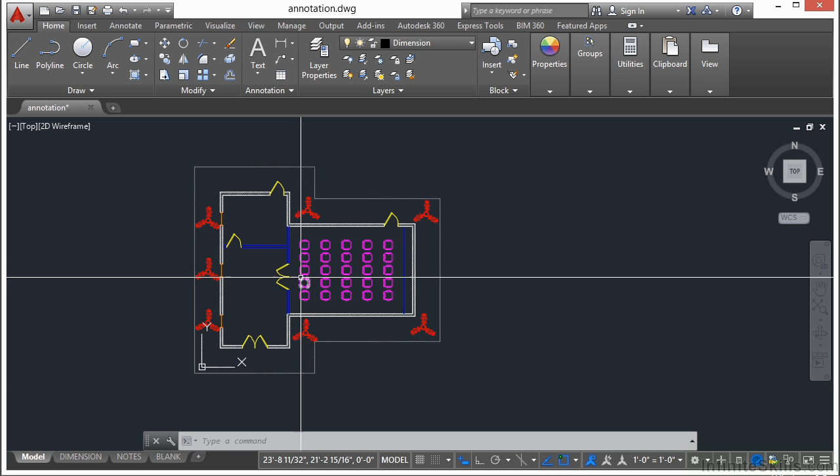So let's look at the door at the bottom corner of this building that we see here. This door block is a dynamic block. You can see here that it has a lot of different fancy grips on it. These grips are typically customized when the block is created. Let's go over some of these.

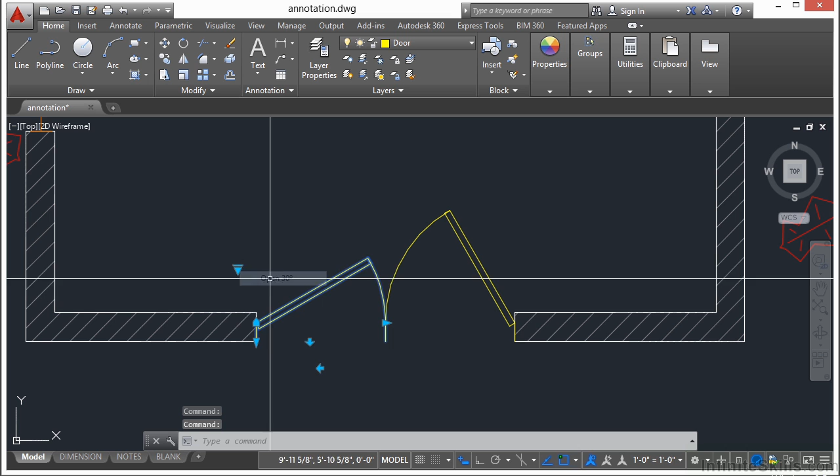You'll notice that when you hover over the grip, it will give you a bit of a tooltip. It'll tell you what it's going to do. This sets the angle of the door opening. When I select it, I have different options. I can make the door closed. I can open it up 30 degrees, 90 degrees, 45, etc. Very useful.

This grip right here sets the wall thickness. All I have to do is drag it up or down. You can see on the left, it changes from 4 inches to 5 inches to 6 inches, and the line work even changes. This button here aligns the block.

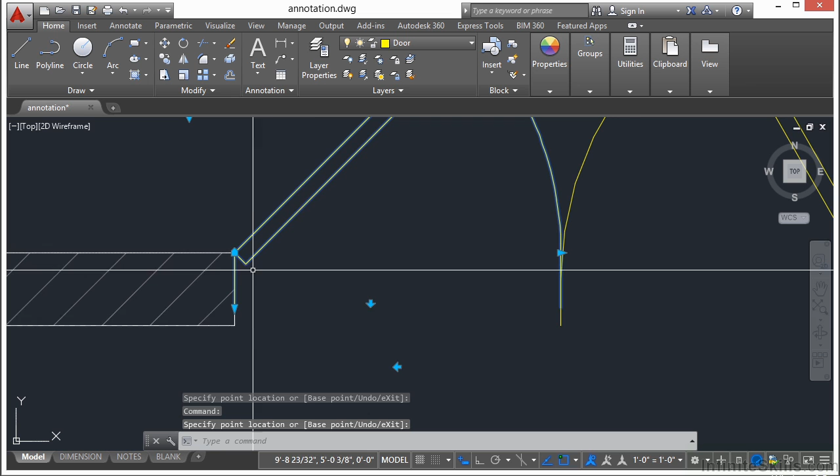It acts sort of like the standard move. This button here will set the direction of the swing. It opens in or it opens out. It's a toggle switch. This is very similar.

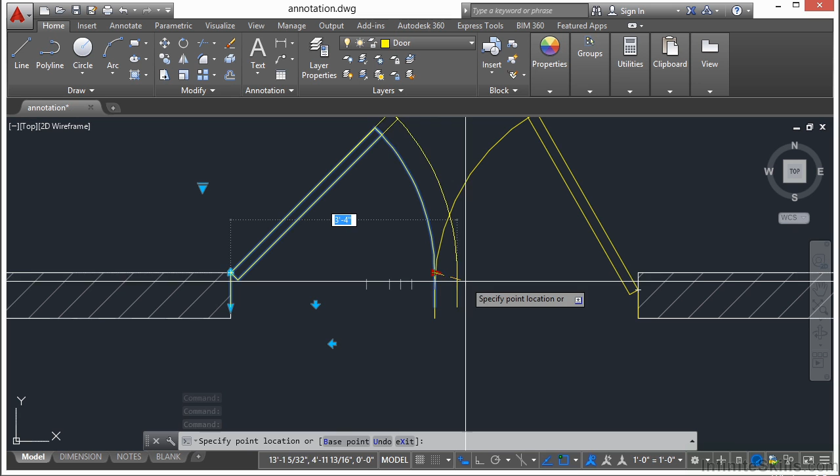This will move the door in or out. And then this grip here will change the width of the door. I can stretch it out to 3 foot 4 inches or all the way into a very tiny door of 2 feet wide. Just press escape to let go of that. All of these door block instances that you see here are the same block. It's very useful and helps in your design process.

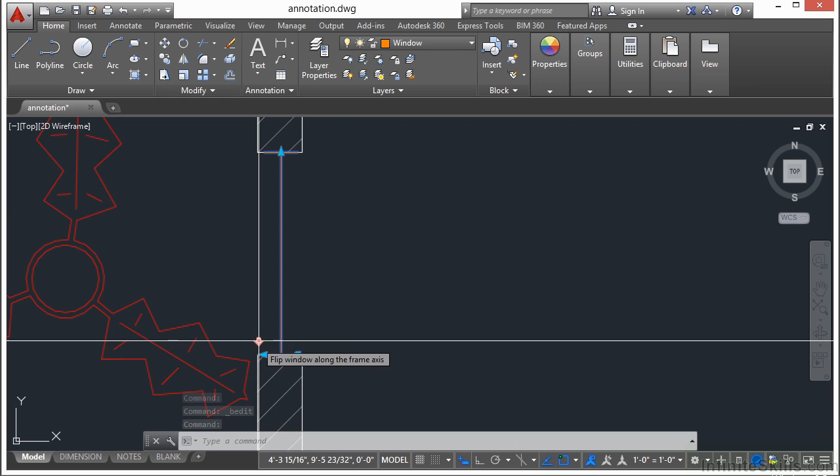Now the window block next to these doors over here is very similar. Now it looks very simple. It looks like just 3 sets of lines. When I select it, I get similar grips to what I saw before. This will flip it back and forth from side to side. This changes the width.

This relocates it to somewhere else. And this changes the width. This one is the thickness, depending on your wall. So you can see here, these blocks are very neat, very useful, and they can help out quite a bit.

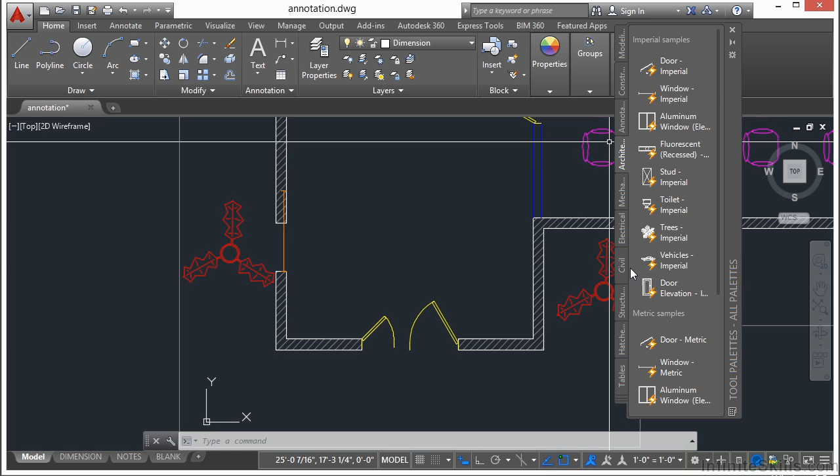Now, AutoCAD comes with several dynamic blocks already made. If you open up your tool palette by pressing the Control key and the number 3 at the same time, you'll get access to a lot of them. This is the door and window dynamic block that's already in this file. Now, when you look at this tool palette, you can tell if a block is dynamic or not because it has that little lightning bolt in it.

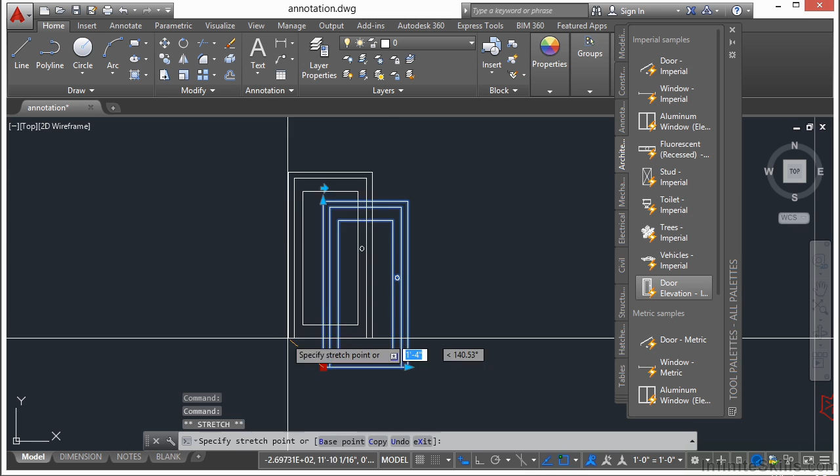Here's an elevation view of a door. I'm going to insert it, select it, and here I can change the width, I can change the height, and I can flip it to the left or to the right. And here I can move it around. Very simple, but yet it adds a lot of different dynamic abilities to it.

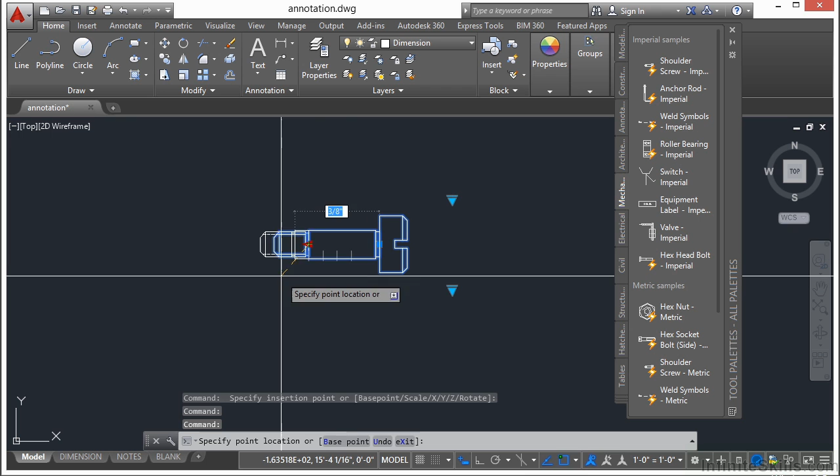If I go from this architectural tab, I go to the mechanical tab, you can see here I have a lot of other shoulder screws and anchor rods and things like that. If I select this shoulder screw, I can change the length of it, I can change the size and the style. So you can see here, there are a lot of different types of screws that I have available to me in one block.

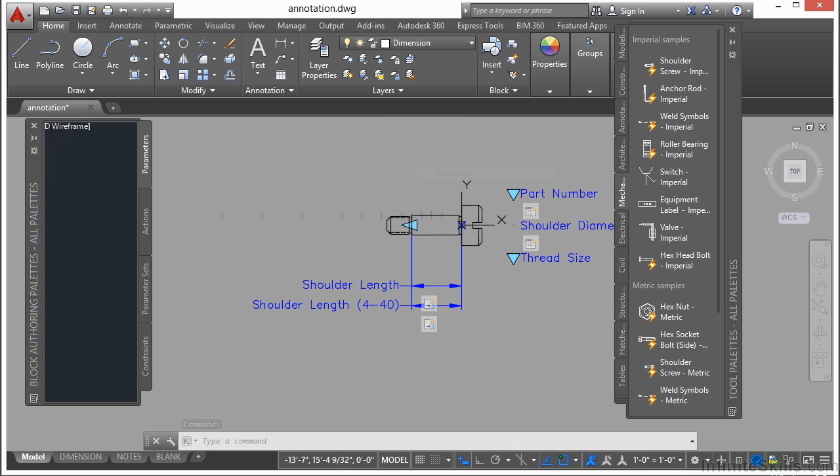Dynamic blocks are great to use, and they are a little bit more complicated to edit and create. If I select it, right click, go to the block editor, you can see here I have all of these different constraints set in my block. They control the input and the output that the user will have when they interact with the dynamic block. We don't have the time to go over these in this training video, but I wanted you to be aware of dynamic blocks and their usefulness.